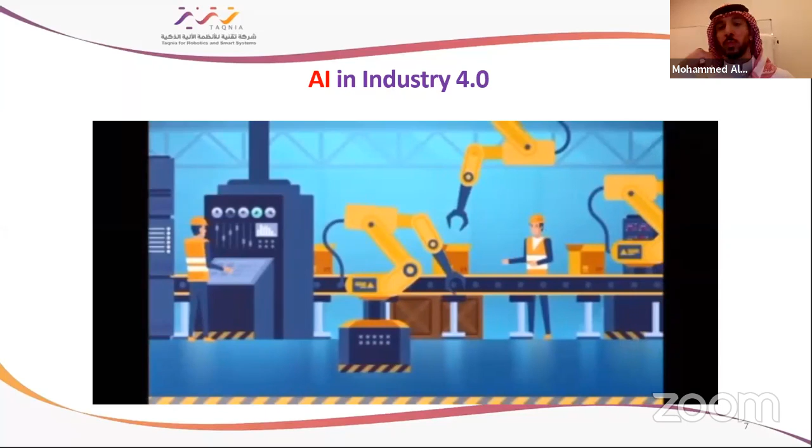Now let's talk about the industrial Internet of Things. The industrial Internet of Things is the use of IoT technology in an industrial application. It refers to interconnected sensors, machines, and advanced analytics platforms that process and produce data to analyze and enhance manufacturing and industrial processes. The idea is to have a smart sensor connected to a machine.

This sensor can be many different types of sensors - it can be an energy meter, pressure, or temperature sensor. Once connected, the machine can also be different types depending on the factory you have, such as a boiler, compressor, chiller, motors, and pumps.

So what happens is the smart sensor will collect the data and send it to the cloud via a gateway. The gateway can send it by wireless or cable, and then it will be stored in the data, which is called the cloud, where it will be analyzed and saved in the platform as well.

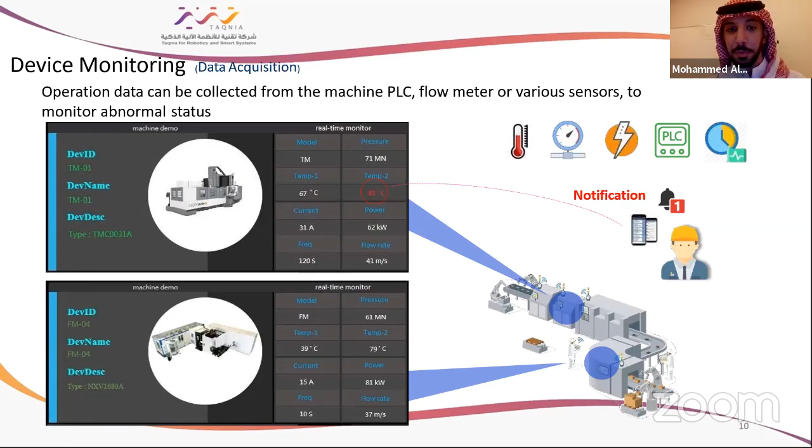This is another example of IoT. Basically, most of them are used in factories. As you can see here, you can connect different types of plants all together in just one screen. You can be the master user, and the master user can communicate with the operators. You can be user 1, 2, etc.

And the benefit of that is in-depth reporting. You can do reporting daily, weekly, monthly, however you want it. It also helps with advanced analytics, which is very important for so many of us in artificial intelligence and IoT. It will do calculations and analyze the whole performance of your machine.

Also, one of the benefits is integration of multiple systems that you have in your factories, like Oracle, SAP, etc. So we don't start from scratch, we can just integrate it. It also helps with cost saving, reduction in energy consumption, enhanced productivity, and reduction in breakdowns. Okay, let's move on here.

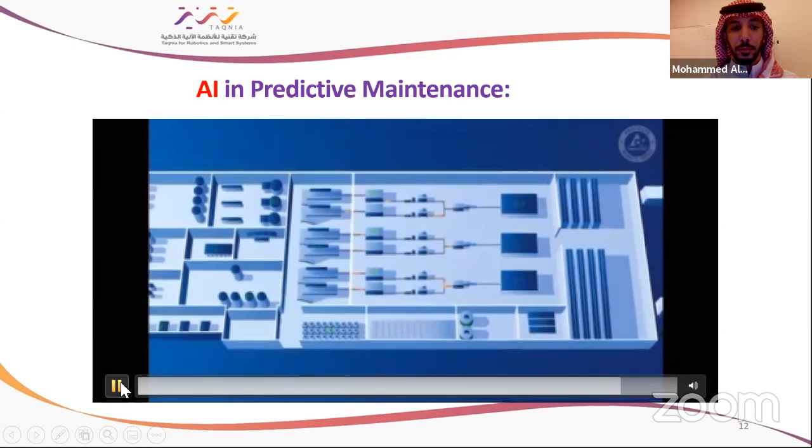Okay, so let's move on to the next page. Now we're going to talk about artificial intelligent industrial and service robots.

There are two types of industrial robots: industrial automation robotic arms and cobots. You have programmed robots and smart industrial robots. The programmed robot follows orders, and we have so many of them doing different types of applications: welding, powder coating, cutting, pick and place, drilling, etc. The smart industrial robot will actually take action and make decisions by itself. We're going to discuss this in the next slide.

The industrial robot and cobot allow operators to automate applications throughout production lines to save time and money, all while improving efficiency and accuracy.

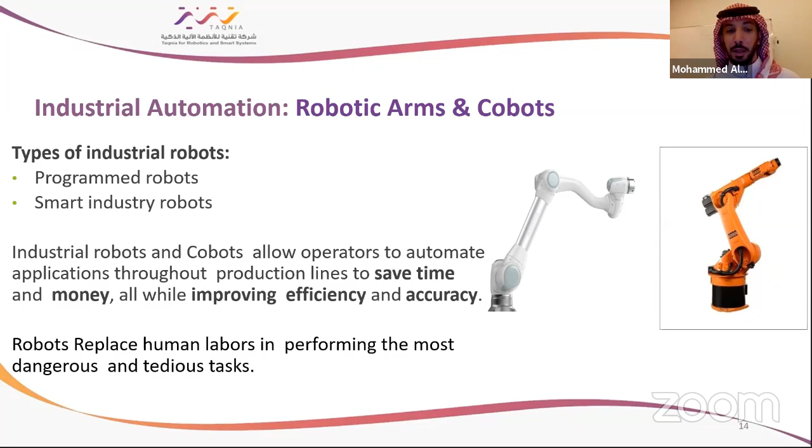Robots can replace human labor in performing the most dangerous and tedious tasks, so hopefully there will be no more injuries. We have some customers talking about replacing welding machines, for example, to save a lot of waste material. That could be in a welding robot, making things more efficient. So this is industrial automation: robotic arms and cobots.

Now we're going to talk about an example of artificial intelligence application in an industrial robot. This is actually a new technology where the robot will take decisions, as I mentioned before. As you can see here, this one has a laser to detect if there's an issue with the item or product, and it will take it and remove it. I'll give you an example of this application.

You may have a water bottle factory, and you want to remove the faulty or damaged ones from the conveyor belt. While it's moving, it doesn't stop, this robot will detect the damaged or faulty one and take it and remove it using sensors, lasers, and cameras. It's going to use an artificial intelligence algorithm here.

So it will have, for example, image processing if you install the camera. The image processing will have camera filtering, so it will send dots in the product itself, and then calculate the distance between each other. It will automatically and fast analyze this data, then remove it once it's faulty.

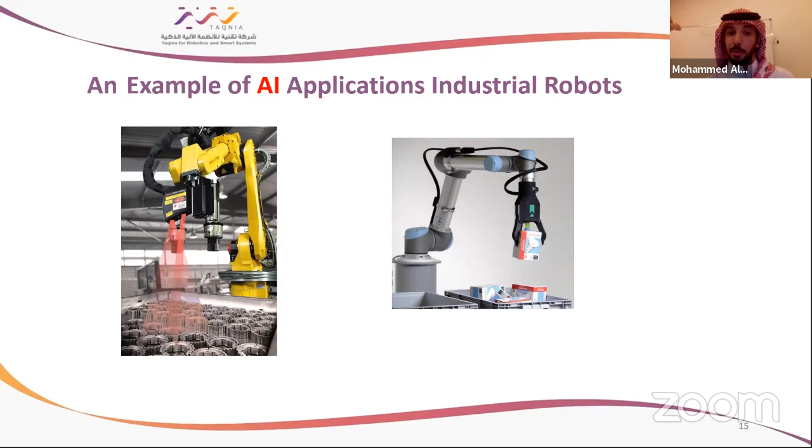So we're going to go ahead and see in the next slide a video about the artificial intelligence application here, and then it's going to be using 2D, 3D machine vision.

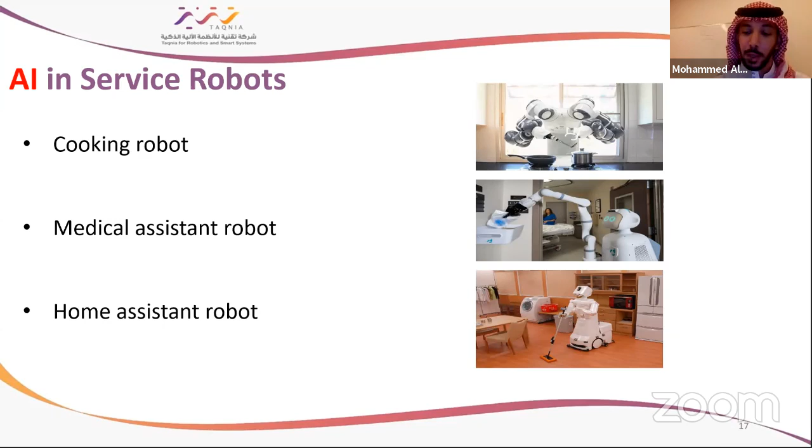Here is a video of the cooking eggs I would like to show you.